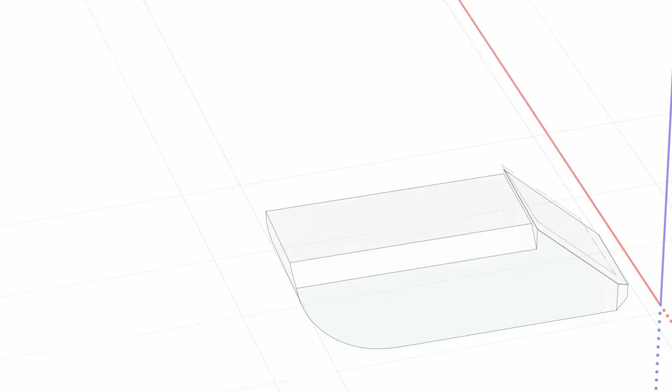I want to look at a new tool. Well, it's new for 2021, and that is PreDesign. PreDesign is a piece of SketchUp Pro. So if you have the SketchUp Pro subscription, you have access to Pre-Design. We're going to take a look at what it is and how it works real quick.

Now I just want to lay out exactly what it is before we hop right in. Pre-Design is a tool to help you with the design of a structure. It's an information system that will allow you to go through and make decisions about your design, your building, before you start building it. Pre-Design at this point is not directly plugged into SketchUp, so I'm not going to make changes in Pre-Design and have it update or change my model, but it's going to give me information. It's going to help me make the best choices when I design a new structure.

So I'll stop describing it and start running it. Let's hop in and take a look. Okay, so this is Pre-Design. When I first come in here, I'm going to have all the studies I've done. In this case, I have some demo studies here, which I could hop into and look at, but I'm just going to go ahead and create a new one.

So I'm going to click Create New Study. What it's going to do is come in and ask for a name and a building type. I'm going to call this New Home. And because I'm calling it home, I'm assuming it's going to be a residential structure, as opposed to an office or school, which are going to have different requirements and different building types. So we're going to use residential for this one.

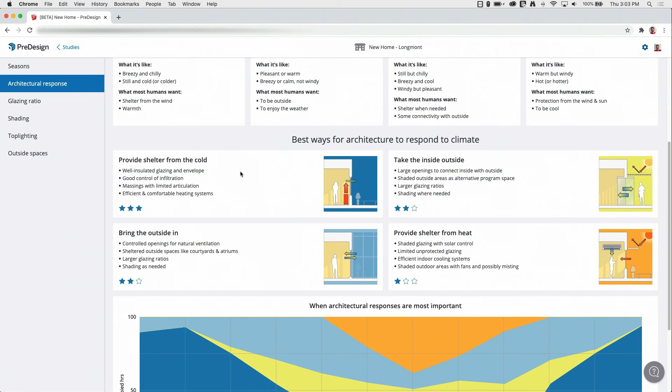So this is some general information, what it's like outside, and then what do humans want out of that type of climate. And then if I come down here, how are we going to interact with that? There are different options, and these are going to change depending on the location. So these are just some general ideas based on where you have selected and how you might want to consider your design as you move forward.

And I'm a big fan of graphs, I like this kind of stuff. So down here, here's the 12 months of the year, so you can move along there.

I have some different ideas here about how often I'm going to need to take shelter versus be outside, versus shelter from the cold versus shelter from the heat as I move through the year. This is really cool because as a snapshot, I can look at it and go, okay, I'm building in Longmont, Colorado. I have a big portion of the year where I have to worry about protecting from the cold, and protecting from heat is going to be a concern a little bit right in the middle, but not all year round, so that's good to know.

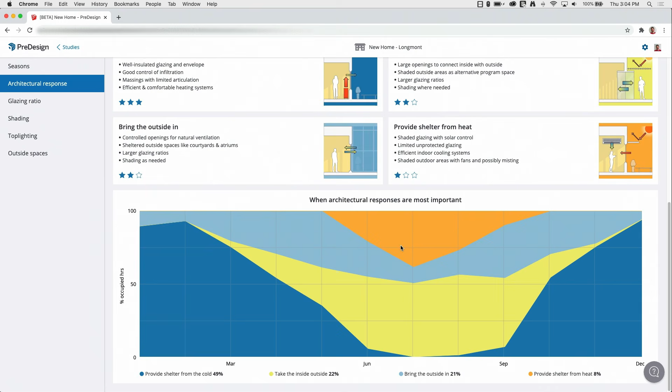If we get into glazing ratio, this is nice because this is where I start to get a little bit more interactive. For one thing, I can actually see my glazing ratio change as I move around the building, because obviously different sides of the building are going to require different setups since the sun hits them differently. So you can see as you move through the building, the incoming sun is going to change.

If I come down to the bottom, it will tell me the ideal or maximum glazing I would want for different types of window treatment. So I can come over here and say, oh, I'm going to go with a non-metal frame, double glazed. I can turn some of these options off - this is a new build, so there's no shading right now, so I turn those other shading options off. It's going to help me narrow down this list of 216 strategies in total, so this will let you limit that and get a better idea of what you could be using on those windows.

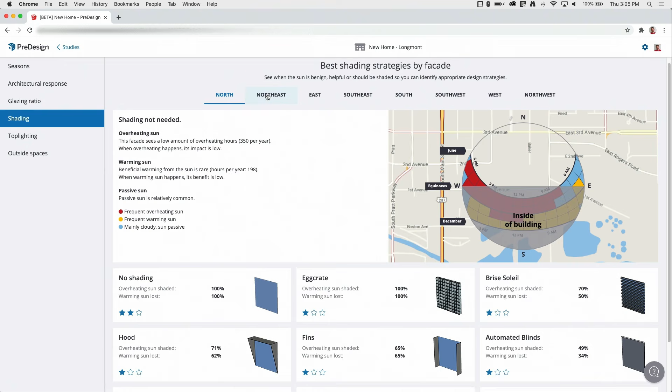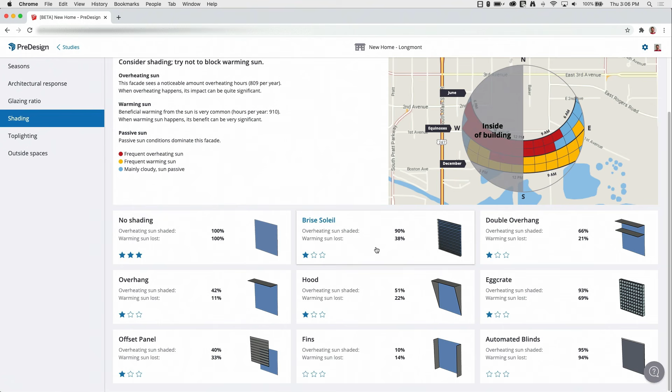I can go to shading, and shading's nice because I get a couple things here. I can see the shading on the different faces of the building, and as I move around it you can see this map of the months and time of year where I can see what's dominating during different times. I can also see what kind of shading I might consider for windows - different options with overhangs, egg crates, blinds, hoods, and other options to protect from sun or heat coming in through the windows.

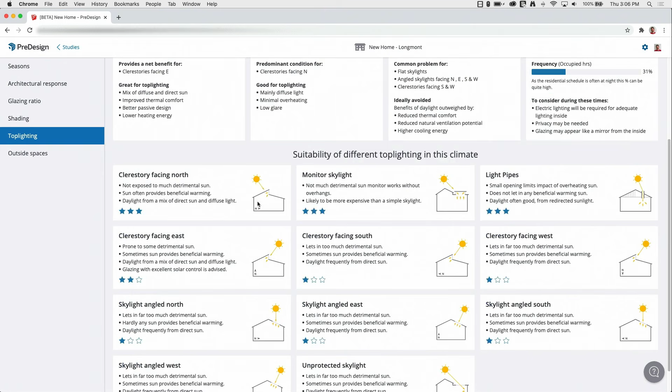Top lighting is going to give me information relative to sunlight, skylights, sun coming in from above basically - this is not the windows, this is actually coming in from above. It talks a little bit about the benefits of doing that, and then also some options and different suitabilities and how well they're suited to the location you're designing for.

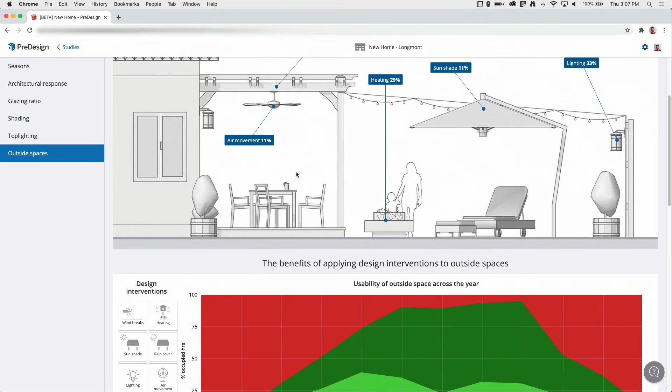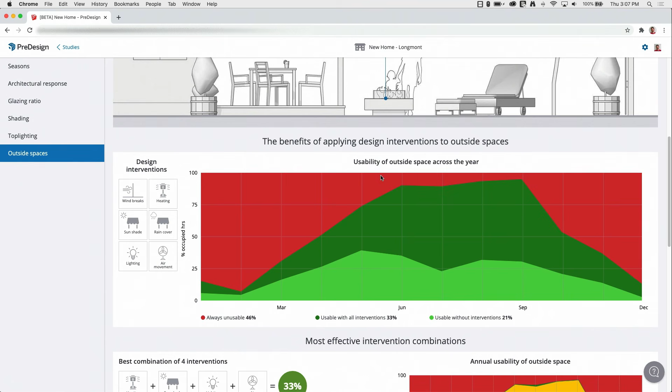Finally, outside spaces. I like this one because I really like this picture. This comes up and tells you how much energy you might want to put into the different outside options. So obviously, like we saw in that graph where I had a big portion of cold outside, that means I'm probably going to want to consider, if I'm doing something outside, including heating of some sort.

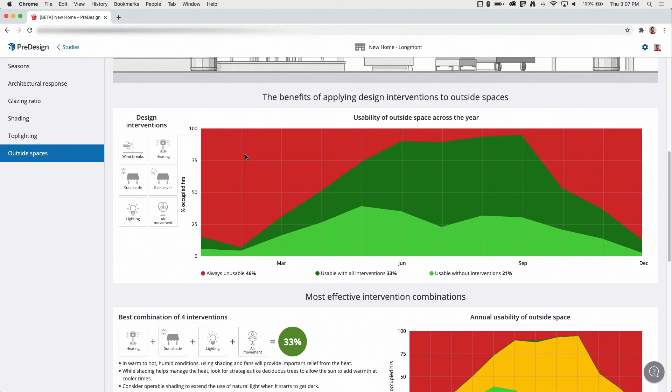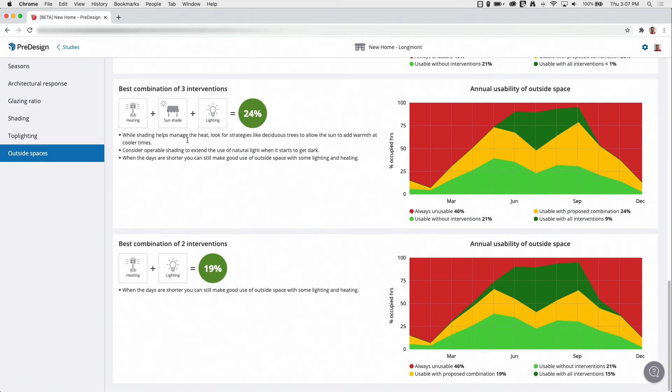This is another graph that's going to show similar information throughout the year, but it's inverted because when is it more usable? What times is it more usable than others? Again, because of the cold in the spot I'm designing for, it's less usable at the beginning and end of the year, whereas in the middle I can get out there a little easier, ideally with some interventions, which are most likely things like heating or windbreaks. So then I have some options about how to bring these different interventions together to optimally design for outside use in this location.

So this is a whole lot of information, and it's a lot to absorb, but it's great info. What you want to use this for ideally is at the very beginning when you first jump in and start your design, or as the name says, pre-design, maybe before you start your design. So you can take this information to help you come up with that original concept model and start putting your actual model together. What's the outside going to look like? What's your window situation going to look like? Do you have skylights, top lights? Is that the issue or not? A lot of that comes down to where you're designing for, and pre-design is going to help you make those decisions. Check it out.